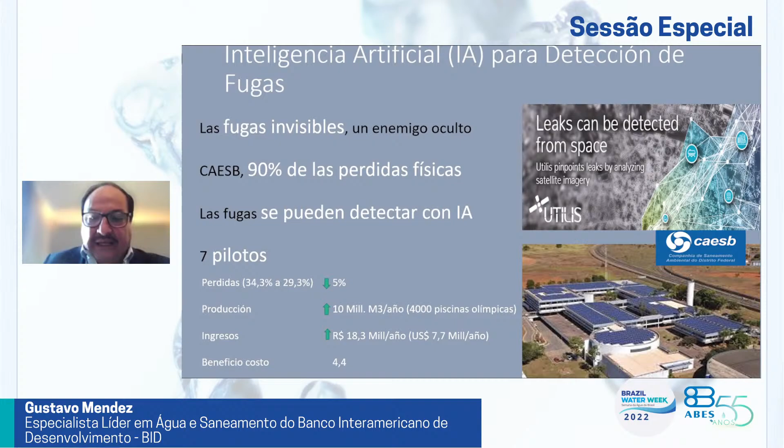90% of physical losses are invisible leaks that drain and weaken our finances and the finances of companies. But today, with new technologies, invisible leaks can be detected through artificial intelligence. 7 pilot projects were able to reduce losses by 5%, which means 10 million cubic meters per year, and this also impacts our costs. All of this was done through artificial intelligence.

Now, on to lessons learned. We need to improve our management. We need to have better management. We need to really drive a culture of change. We also need to work with pilots, because successful pilots help us make changes.

And of course, when you have innovation, we also have risks, but we need to learn from our mistakes, which makes our organization stronger and more resilient. Thank you so much for your time, and now I'm happy to answer your questions.

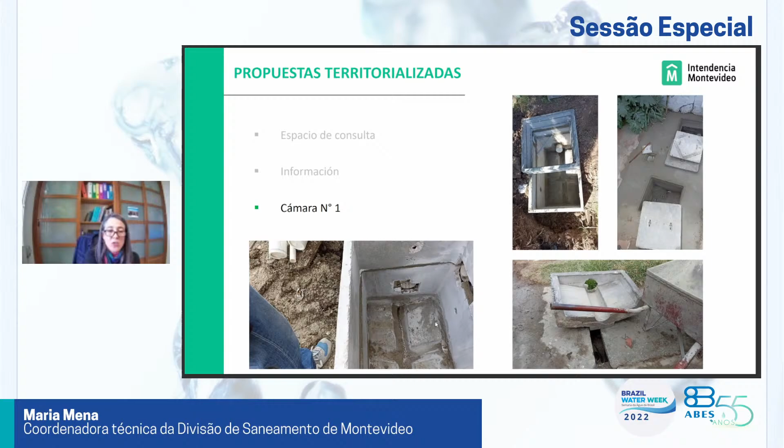When we started to work with various sectors in the public sector, we created a hotline for the residences, and we tried to create in the property and build this initial phase. As you can see in the photos, we are building this first chamber in the residence that didn't have this system, and the collector is in the street and can be physically connected to people's houses or residences.

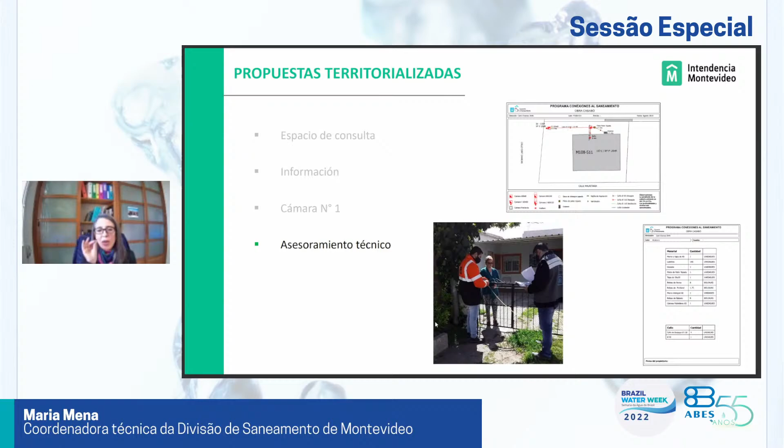And this was a major change and brought us some very satisfactory numbers. What we also do is technical assistance, and that has great and very important value for us to hire a technician. It's very important for the project being done right and showing people how to properly build. We deliver the design with a step-by-step outline of how to build, and that's produced very positive results because only with the technical support are we able to achieve great results.

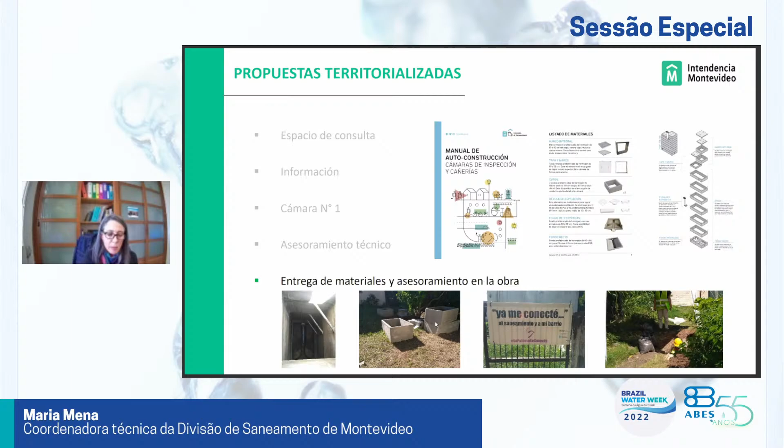And for the most vulnerable populations, we deliver material, we provide advice in the construction, we provide support and construction materials to resolve technical issues that could arise along these lines. And lastly, the financial aspects of financial sustainability.

We have a fee for sanitation services, which is charged as a function of the consumption of water. It is a price that is very accessible, and the social benefits for this category has a subsidy of 35% in the first few months. Also, 100% of the inclusion of the projects we've done and the changes that we've done afterwards. This is a plan that really has major benefits, and everyone is able to pay a fee for the services that really changes people's quality of life.

And furthermore, we also have a 10% fee that is charged during the construction, and this is how we found a way to create a sustainable fee structure for long-term investment, so that we can produce universal access to sanitation. Thank you very much, everyone.

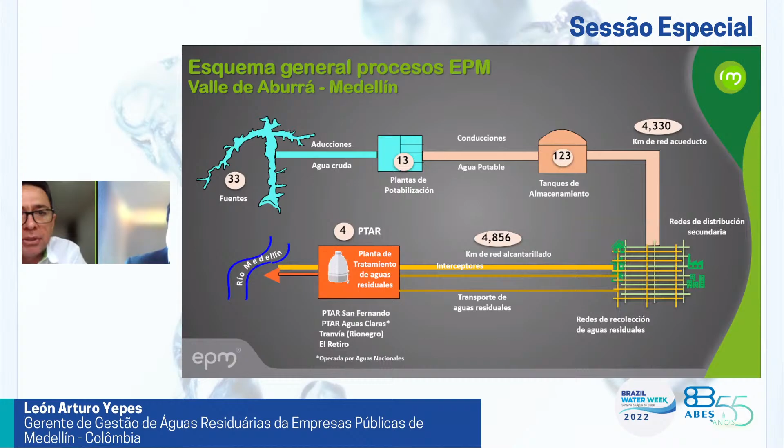And this is then put into the Medellin River. I will talk about the whole sanitation model. I want to show you in this presentation on universal access.

Everything starts with a need, and there's a need that is very directed to the attention of various countries in Latin America, the development of these cities that were built next to, on the river, on the banks of the rivers, like Medellin, that all of them dump their wastewater into the river.

And we did an entire planning, and you can see here the Valle de Aburra and the municipality of Medellin, that's in the central area. Those who know Medellin know very well that it is a valley. We have the Medellin River throughout the entire valley. It is a mountainous region, and it flows through this valley through 10 different municipalities, what we call the metropolitan area.

So we had to create a strategy, a program for bringing together all of this wastewater and sewage before it reaches the river from north to south, and create an entire plan for the collection and treatment of this, that entered operation in 2000.

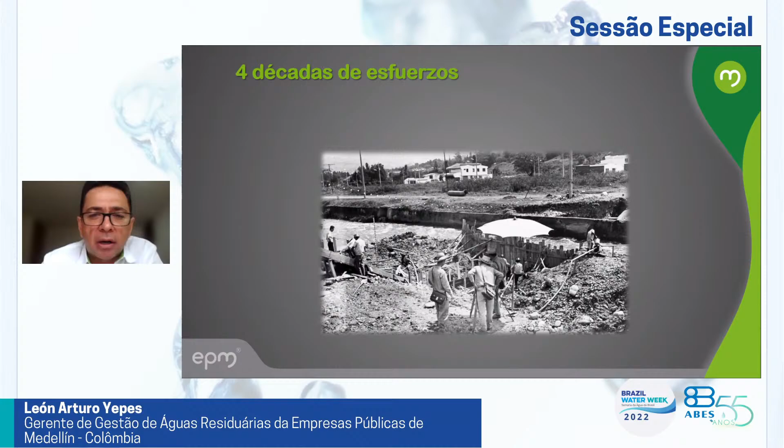We built this sanitation plan with no additional outside funds. It was always self-funded by the users, and this was supported by important banks, and one of them, the major one, was the IDB that was our partner in this journey.

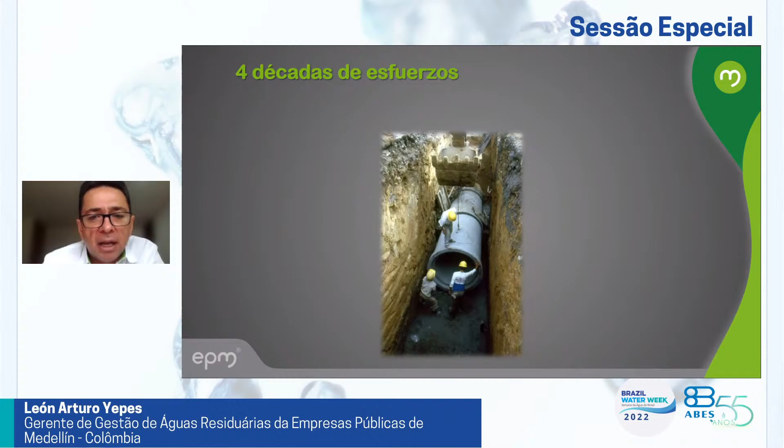But another great ally were the companies that participated, our users, the clients, who finally were able to understand the importance of this sanitation, and through the fees they were able to contribute.

This was a benefit work of over 4 decades that brought us to create this entire system, and these are the wastewater treatment plants with benefits, of course, for the city, not just the environmental aspects and health aspects, but also they start to show up in recreation areas that allow us to have the development, and the same river becomes a driving force for the development of the city and the region.

Today, around the river, we have some occupation that we understand because we created a prioritization for sanitation of the river. We have a zoning where you can not only have industry and retail and sports centers, but also we can plan for housing. There's a whole level of development that some years ago, when the river was completely contaminated and smelled horrible, wasn't possible.

So these benefits allowed us to increase. We measured, our objectives were to increase the dissolved oxygen. You can see that before we had levels of dissolved oxygen that were very close to a milligram or less, so it was totally heavily polluted. Today the objective was achieved, and we have values over 5 milligrams per liter of dissolved oxygen.

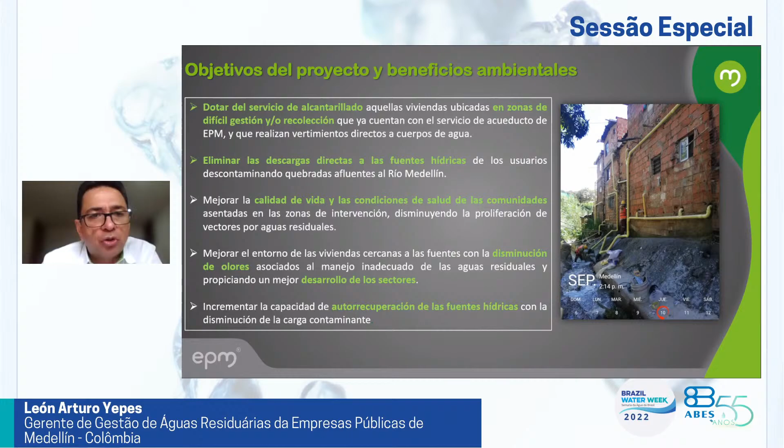What we achieved with these projects in this community is that they were very happy to have greater acceptance of this, because it generates a very important change in their lives. This also caused the recovery of our water sources—we were able to develop other water sources to a more natural level.

We had three major points because we had limited space and specifications, as you see in the photos, but we also had to seek solutions that would allow us to produce this sanitation through, as you can see, pipelines through mountains and hills and various technical elements that allowed us to advance on this topic.

Here you can see some of these photos of these locations in very unconventional areas that allowed us to produce this access. As you can see, they're very complex—in a certain way these are situations or solutions that have an important cost when compared to conventional solutions. But as we always insisted, with the infrastructure and with sanitation, we will produce these solutions.

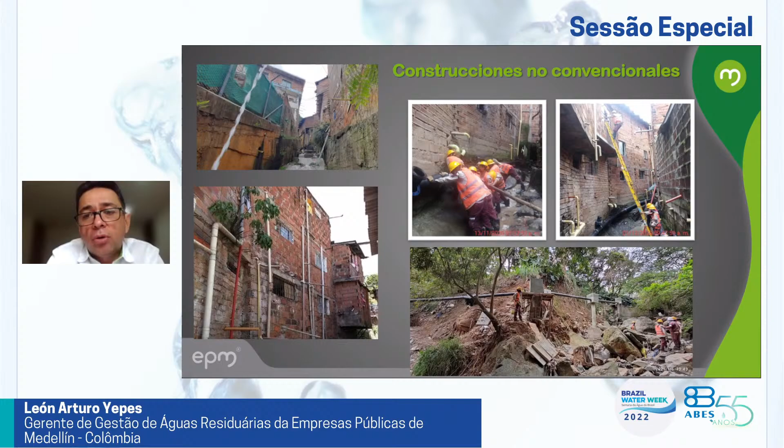Today we already have to start thinking about sectors and locations where it's difficult to collect this sewage—it's important to provide universal access to this service.

In summary, our results show a challenge that allows us to meet the needs of the people in these regions. It's a challenge to provide services to many more regions because, fortunately, people continue to come into the city. Because of their social situation, these populations have informal communities without urban planning, and these are situations we have to deal with using both conventional and unconventional methods.

So we have this tool that allows us to reach the city from an environmental point of view, but also social point of view. I would like to highlight the reduction of the pollutant load with the reduction of disease vectors and odors. The project was presented for the contest of prizes and ideas in action in the IDB, and we obtained the certificate for having participated, and we were selected as the winner. It was a great satisfaction for us because it was a great effort by the whole project team.

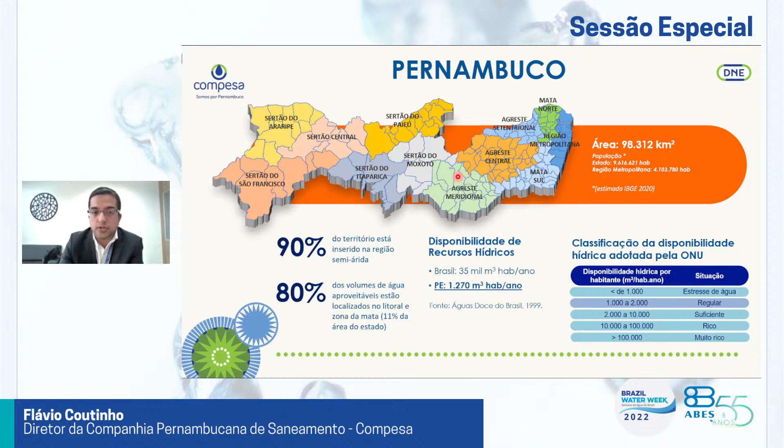This is quite a big challenge, but we are constantly trying to expand our wastewater sanitation system, and that's why we have built a program in our metropolitan region. This program was done through a public-private partnership with BRK Ambiental. This is a project that is going to last quite a few years, 35 years. We have already estimated an investment of 6.7 billion reais, and we will be sharing different tasks regarding infrastructure and regarding the expansion of the system.

We know that we need to expand our wastewater system so that we can benefit the whole population of our state. We have already invested around 2.05 billion reais, so all of this region today already has some of the projects implemented. There are some other municipalities in the metropolitan region of Recife that have already seen the beginning of some of the works, or that have already had the project fully implemented. In some other areas, we are implementing expansion projects.

My previous colleagues have already talked about how hard it is for us to expand the wastewater system anywhere in our country or in the world, for that matter. It's very hard for us to have the different parts of the population adopting our system. So we need to innovate more and more, and we need to have programs that can actually serve the population as a whole, no matter where they are.

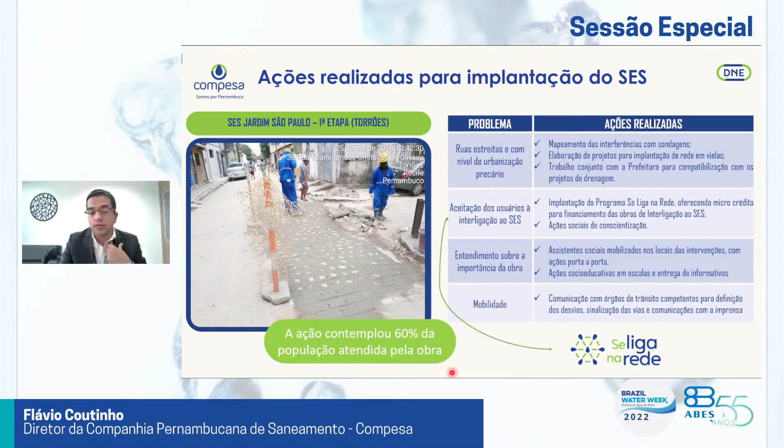We are also working with commercial areas, and this way we are able to work with these companies. We also work with private companies, and to stimulate them, we have created a microcredit system so that all the population starts using our system, and this way we can avoid this population dumping sewage in an inappropriate space.

Different from what happens in other utility companies in the country, today we also have some benefits for the most vulnerable population. We just charge a very small fee to some of our clients, and there are low-income clients that are exempt from this fee. So those clients that can't afford it don't need to pay this sewage fee.

This is something that has been around for many years, part of our culture in the state. On the other side, you have all the conditions these populations need to prove so they can have this benefit. Our water tariff is very low, and we have clients in vulnerable situations not paying our sewage fee. 8% of our population benefits from this so-called social tariff, this exemption. So we have a very large group of our population benefiting from this today.

We have also identified some other areas that will benefit from our projects. We have some areas in Brazil where people live in hills, or in very remote areas, or in areas where the urbanization system is not really well implemented. So we know that we will have to work quite hard so that we can reach these areas. We have a lot of our population living in these areas.

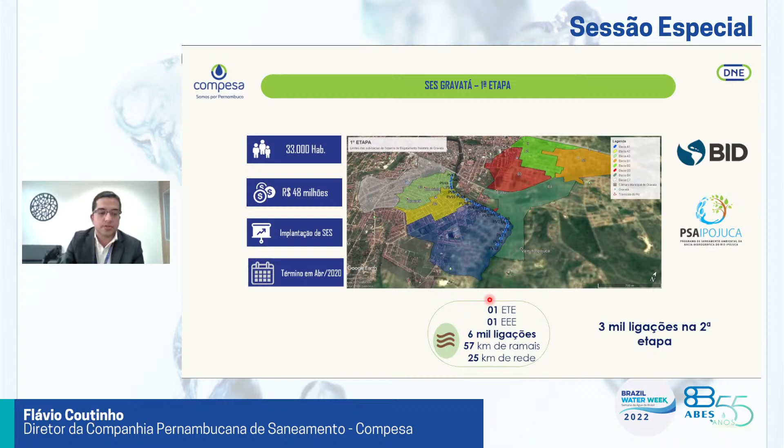So we have been working in many different ways so that we can expand our sewage system network. That's all I wanted to present for now. I know that I was speaking very fast, but I hope that you were able to understand everything that we have been doing over the last few years.

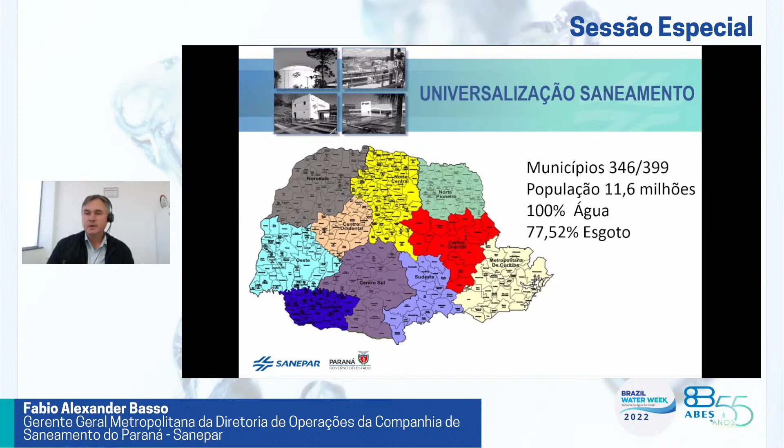We serve a population of almost 12 million people. Our rate of clean water supply in the urban areas is 100%. On a state level, we have a collection of sewage of our network of near 78%. When we look at our numbers for larger cities with 100,000 inhabitants or more, cities with greater population representation, we have numbers that are also very significant, with an average of 85% sewage collection.

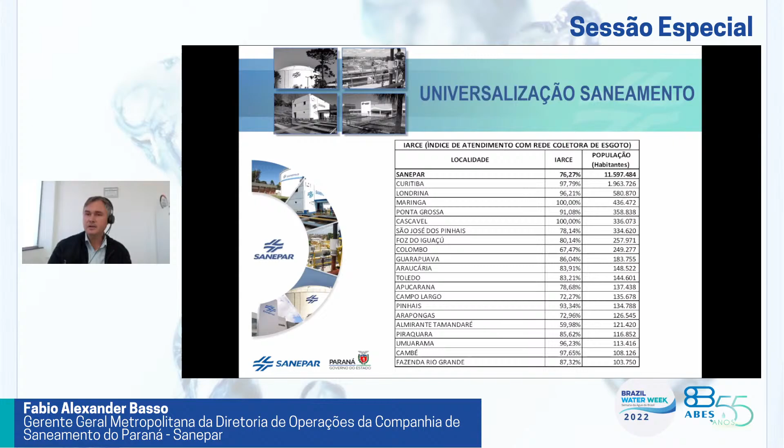In some cities we do the same correlation with the water network with regards to the number of sewage connections. We have a 100% rate of service, and in many cities we're very close to universal access, as is the case in our capital city, Curitiba, where we have a population of 2 million inhabitants. We currently have a rate of 98% service provided by our sewage collection network.

So we start with the problem of this great theme of universal access, which is so important and so transformative to people's lives that we need to make progress on. When I have the opportunity to comment, people tell me about the challenges to achieve the missing percentage, as was said by the other colleagues who spoke previously. We need to advance in this sanitation sector with different solutions from the conventional ones.

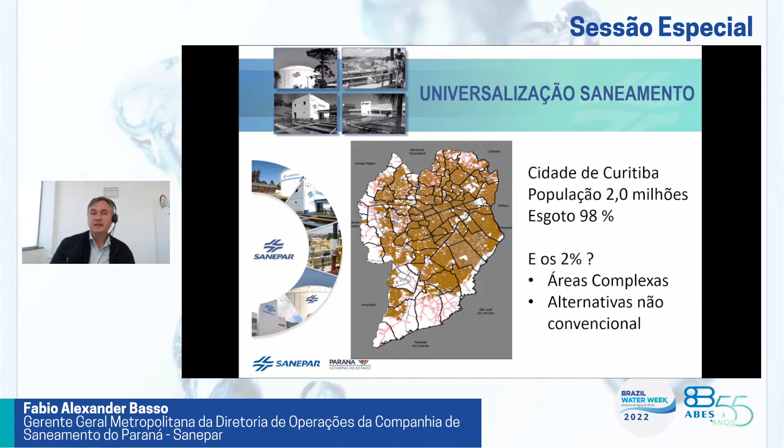There are alternatives, engineering solutions, and solutions that may depend on other stakeholders beyond the service company itself. So engineering solutions, but also within a financial context where we take into account what the population is able to pay.

Along these lines, when we sample the difficulties and the actions needed to make progress toward universal access, we find situations like this example I'm bringing here: in this experience, in a certain area, for us to achieve sewage collection network coverage using the conventional model, properties would only reach 60%.

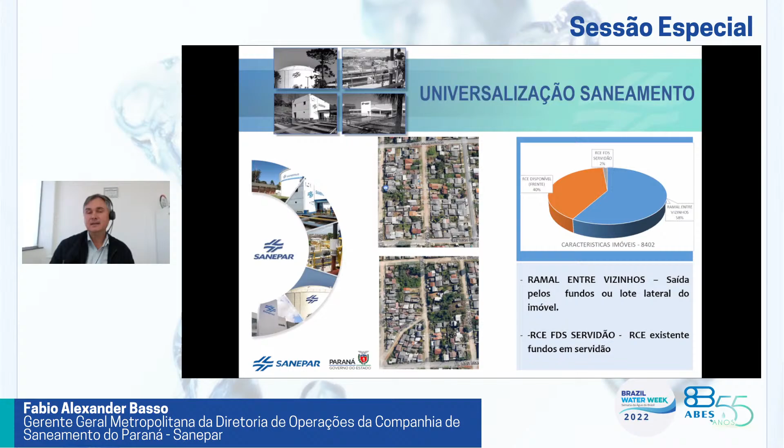So we'd have to think of another 40%, which isn't solved by one alternative solution alone. We'll have individual solutions, issues of individual pumping and collection networks, but in this case specifically, 58% of the cases show to be feasible with an alternative solution to the network going through their own properties, so we can make progress meeting the needs of many other people needing connections. Similarly, we see the need for easement areas so that we can provide this service. So this problem brings the discussion of the need for alternatives in engineering that are economically feasible and fall outside the conventional range of solutions.

An experience and a concern we're working quite intensely on is the objective of universal access. All of us talk about universal access and we imagine a sewage collection network in front of every building. But what do we really expect from universal access? Is it just collection networks, or is it transforming people's lives, adding value, making differences in people's lives, providing better health, providing preventative medicine, which is the great mission of our entire sector, and bringing healthcare as a consequence, and quality of life to society?

When we find ourselves faced with this type of question, it comes to light in our discussions here in the company, in our strategic plan, and it's part of our multi-annual investment plan. The numbers presented previously owe a great deal to a multi-annual plan aligned with the overall master plan for sanitation, with the goals of the landmark law and also the municipal goals, and we're meeting those goals every year.

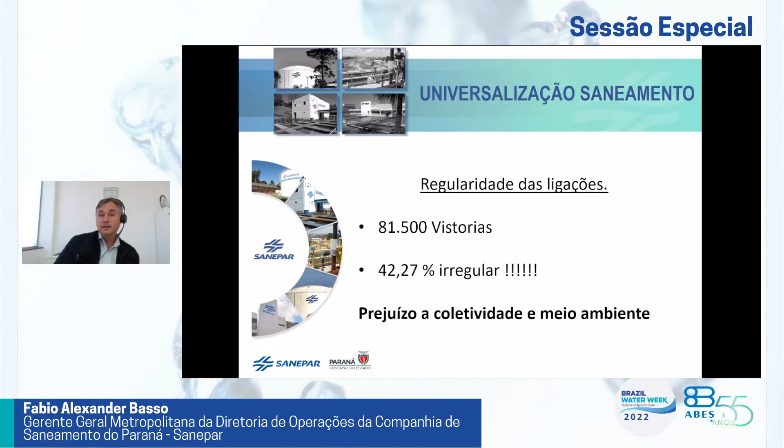So this is a topic that needs to be addressed, there's no question about that. We will make advances in this situation, as with other companies in the country, and as presented by our colleagues here, with the work of raising awareness.

We have to develop environmental managers at a local level in society, and we have an enormous amount of work that starts in the schools and goes out to society itself, with the program called Connect Yourself to the Network, providing technical support for correct connections into the network, because many of these situations are poorly connected.

Not because of malice, but just a lack of information. The plumber hired by the homeowner does not know the system well enough to make a correct connection, and so they make the connection in an improper fashion. We believe very strongly in this awareness-raising work, but unfortunately, for some part of society, raising awareness alone was not enough to get proper installation done.

Whenever I have the opportunity, I say it's like wearing a seatbelt in traffic. We as Brazilians use seatbelts not just because of awareness-raising work, but because we are penalized, we are fined if we don't wear a seatbelt.

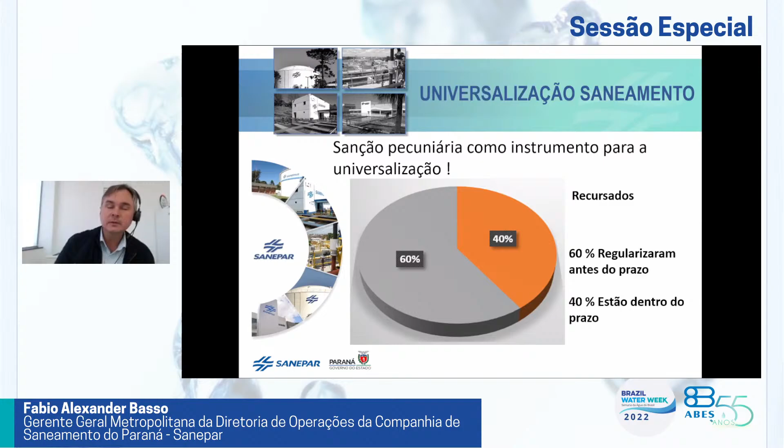And these improper connections, although we have a tendency to think about areas of greatest vulnerability and people with very low incomes, many of these improper connections are actually people with very high incomes, or some very high-end restaurants here dumping cooking oil into this sewage network, causing enormous problems.

And finally, our concern with bringing sanitation to everyone, access to basic sanitation to everyone. And that's how, as with every city, we have the problem of illegal land use, and this is the same everywhere.

So as well as trying to legalize the occupation in this municipality, where the municipalities are legalizing the use of the land, we are now advancing a pilot project encouraged by various stakeholders, Sanepar, the public prosecutor's office, the municipal authorities, the regulatory agencies. We are identifying some areas of improper land use that have been there for many years and won't be leaving anytime soon, so they can be provided with proper land titles, regularizing the ownership. It's just a matter of time.

And there we have all the problems of improper water connections and huge losses. So we are working together with various stakeholders to synchronize the provision of water and electrical power, and provide it as a way of environmental compensation in these illegally occupied areas that already use the water, so they generate sewage. Most of them are in areas close to rivers and streams, so as a way to compensate the environmental damage, we have the collection and treatment of sewage.

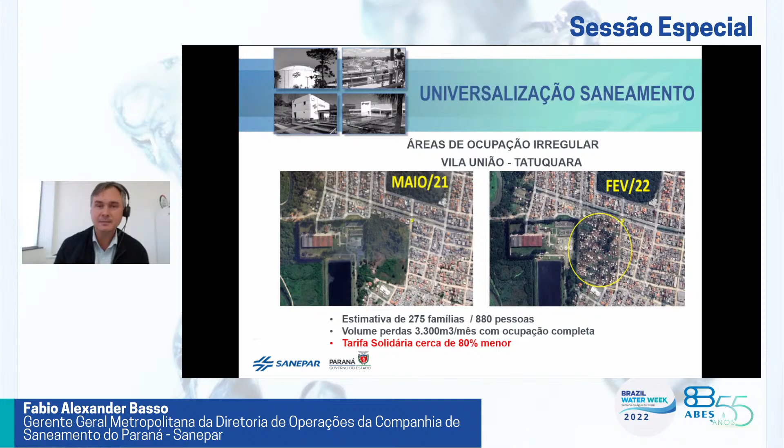So these are important actions that the company has made progress in and has been working very intensely on, to not just fulfill goals, but to transform people's lives, bringing the best of our work, which is health and quality of life, the practice of preventative medicine, to these populations.